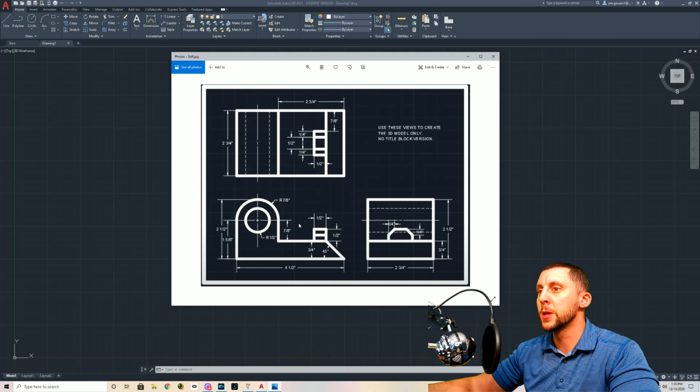Here we go, we are drawing my 3D forward drawing. As I'm looking at this, I'm always wondering what is the width, what is the height of each view. We've got 2.5 here for the height of the front view, 4.5 is the width.

That means those two numbers are going to be the same in other views. So if the width of this one is 4.5, the width of the top is going to be 4.5. Pay no attention to the 2 3/4 right now. From one side all the way to the other should be 4.5. The height, 2.5 and 2.5.

So the height of the front is 2.5, it has to be the same in the right side. There is a drill hole here, and that drill hole goes through the entire object. You can tell because of the hidden lines and the center line. You can also see it in the right view, center line going down the middle and two hidden lines going all the way across.

In the front view here we see something that looks like two blocks that are stacked, but it's a little confusing, so you've got to look in other views to see what's really going on. Over here I can see that it goes up about 1/4 inch because the entire thing is 1/2 inch tall, and I can see that this part is 1/4, so the other part has to be 1/4 because 1/4 plus 1/4 is 1/2.

But this is going to go up about 1/4, then it's going to have a chamfer on it, and then it's going to go across by 1/2, and I know that because over here we've got a 1/2 measurement. Then it's going to chamfer down over 1/4, and then come down another 1/4. Let's see, what else is important here?

From this part to the very end of the object, 2 3/4, make sure that your views line up. My students, some of you guys are missing this. If this is the front view, the very left has to line up with the very left of the top, and the very right has to line up with the very right of the top.

And I'm going to draw, let's see, where is it? I'm going to draw this front view first. It's 4.5 by 2.5, so you can box that out at first if you'd like. So I'm going to go 4.5, 2.5. Now I don't know how far across here, so I'm just going to go like this. And I don't know how high yet because I haven't looked, so I'll go like that.

Looking back at the drawing, you can see that this shelf here to this part is going to be 3/4 inch. So instead of just drawing that randomly, it's probably smarter to just draw a 3/4 inch line.

What I really meant to do was, I don't know how far this way unless I look at here. Okay, so that's how far that's going to go before it goes up, and then the rest of that, where that meets the top line, is going to be where this part is built. Alright, so let's go 2 3/4, and then we're going to go up. That gives us a spot to trim off, and our curved end is going to be here.

Now the curved end has two circles - one is the outside curve, the other is the drill hole. We've got to find the center first. Anytime you see a plus, that means there's going to be circles drawn at that center. So we've got a radius of 1/2 for the small one, a radius of 7/8 for the big one, but it doesn't say how far down to get to that plus unless we do one of two things.

We either do 2.5 minus 1 5/8, or we could do an offset of the bottom line up 1 5/8. Or you can say, this is a radius of 7/8, which means from the center of the circle out is 7/8 inch. So from here to here, that would also be 7/8. That's the way I'm going to do it.

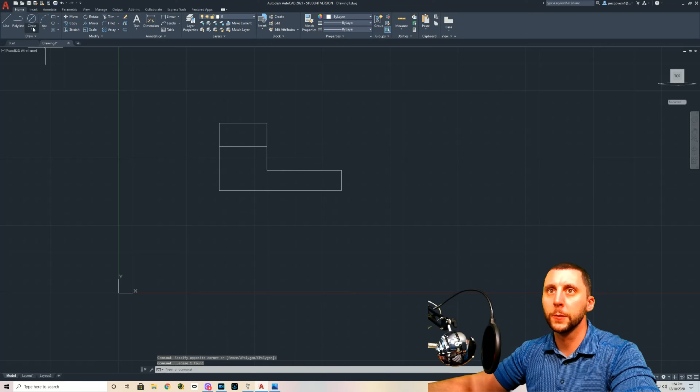Radius at the midpoint, 1/2. The other one was a radius at the same center of 7/8. Now I can just go like this and click here, or I can do 7/8, same thing.

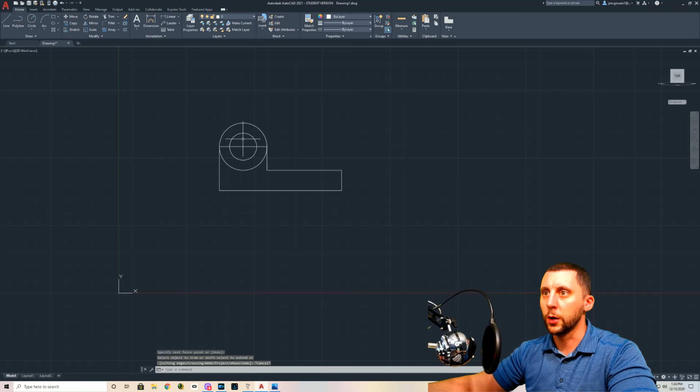The top line I don't need - there's not even any trimming on that, you just erase it. These side lines are going to get trimmed. I don't need this yet. I'm going to get rid of this and do my center lines afterwards, just so it doesn't get confusing. And I'm going to trim the bottom half of this circle.

So we're already at this point here. We need to figure out what this angle here is, and then we got to build that little block that's up here. Okay, so here we go.

That is a 45-degree angle, and we don't know the distance, but we don't need to know it. If I put a line here and go angle 45 and hit enter, it's actually going to travel this way, and you could bring it back, but we want to go the other way. A straight up line would be 90. What's 90 plus 45 would be 135. So I want to do angle 135, enter.

It's not going to give you an intersection here, so don't let it accidentally snap to this midpoint or to that end point. Just draw it a little bit too far and then trim the end off. And we can trim this and we can trim that. That also gives us our start point for the next piece, which is going to be right here.

Like I said, that piece is a 1/2 inch by a 1/2 inch, and then it's split down the middle in the front view, so we don't need to quite understand it yet. 1/2, 1/2, and 1/2 down, and then an offset of 1/4, or a midpoint to midpoint line, it doesn't matter, and you get something like this.

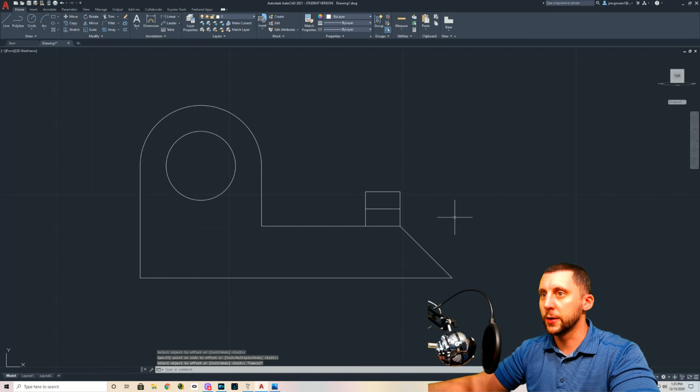The front view is now done. Now, if I do an offset here, I don't have a line up here anymore to measure my 1 inch. So if I know the height of this from the bottom left corner to the top of that 2.5, I could just do an offset off of this line of 3.5, or I could put the line back there by going 2.5 and then going 1. All right, I'm just going to do 3.5 because I think everyone would understand that. 3.5, take it from the bottom and go up.

Okay, now it's good to do that because the ends are already lined up here, so I don't have to draw anything up from there. And this end is already lined up from there, so I don't have to draw anything there either.

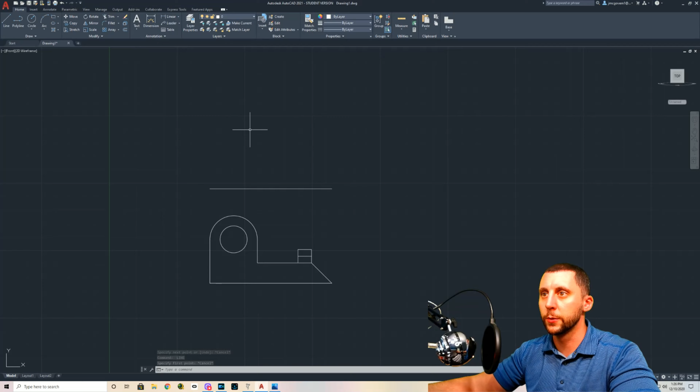So looking at the top view now, it's 2 3/4 deep. So I'll go on this spot right here. I'll go 2 3/4 or 2.75, same thing. What was this number again? 2.5, I think it was 4.5. Yep, and then back down.

Okay, so now you've got the outside box of the top view. I really like to box them all out before I do anything else. So what I'm going to do here is I'll just go like this. I could draw this 2.5, 2.5, or I could come over from the top and slide without clicking, and then click that intersection, okay? And that's going to give me the height of that right view, but I still have to do my offset of 1.

All right, something like that. So now we can get rid of this line. The depth here is the same as the depth here. Remember that if I put a line here and go 45 degrees, those lines would flip over that 45, and you can do it that way, or you can just remember the dimensions. There's only length, width, and height. So how long is it, how tall is it, how deep is it, right?

So we got - what was that? Sorry, I keep forgetting my numbers. 2 3/4. Offset 2.75.

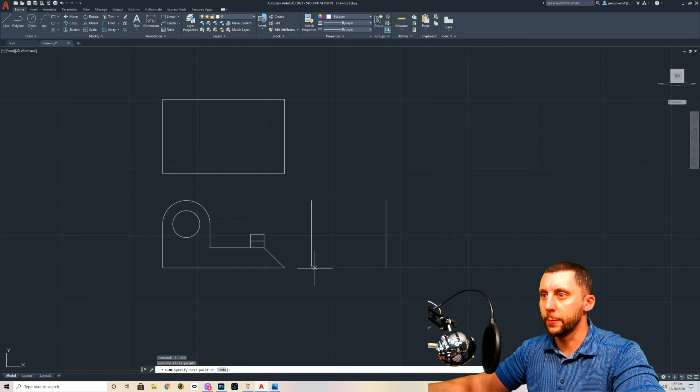All right, I'm going to connect the top and bottom, and then we're all boxed out. All right, let's go back to the top view. The top view has a line from the right side at 2 3/4. Offset 2.75, something like that. It's got the funny shape, okay, and it's got the angle.

So let's do the angle first. The angle, let's think about this. Well, we could just bring it up from the bottom, right? So if we already have this here, can't we just slide and go like this? Now that's our angle. This is a slant here, but it's drawn flat because we're doing a 2D view. So you can't tell that it's a slant, but if you go down to the front, you say, okay, that's a slant.

All right. We know that this piece here is a 1/2 inch, so we're going to go 1/2 off of this line. We know that that piece doesn't travel the whole way. It's centered in the middle, and this top part here is a 1/2, and this is a 1/4 slant and a 1/4 slant. So what I would do is draw a line down the middle. 1/2 of a 1/2 is a 1/4.

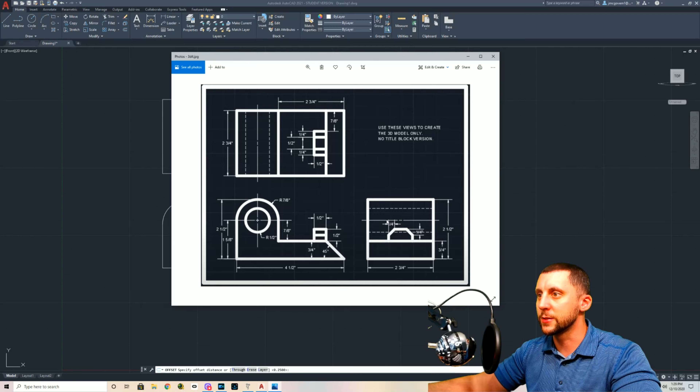So if I go 1/4 down, 1/4 up, and get rid of the middle one, that one was a dummy line. And then I have an offset of, now let's see, can we just do an offset of a 1/4 like that? Yes, we can, because the slant itself is longer than a 1/4 because it's a slant, the actual chamfer, but the distance that it travels is over a 1/4 of an inch. So offset 1/4, 1/4 from here down, 1/4 from there up, and trim and trim.

Oops, I actually did not mean to trim that other line. It should just be that and that. Alright, because we need to keep this line here for this slant, right? So the top view is done, minus the hidden lines and center lines. Going over to the right, same idea. This is a hard line here. Anytime it changes directions, that's what's going to give you a hard line.

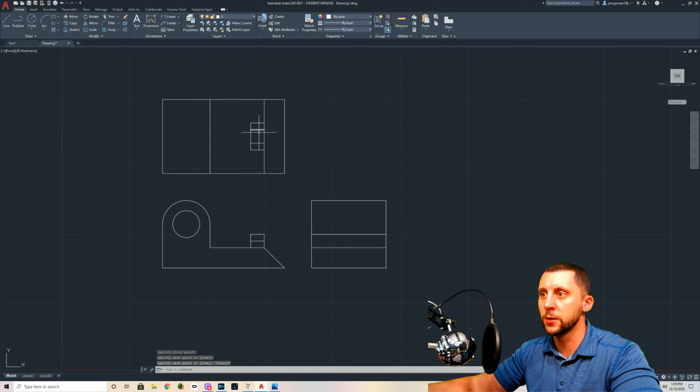So this is going slant up. So that means this point right here is going to give me a line right there. Trim. This one, same thing, is going to give me a top line. Now, it's not going to travel the whole distance. It's going to look like this. So we'll get to that in a second. The top we already have. The center is going to come across for a center line. We're going to describe this circle in a second.

The left and right will go up as hidden lines. The top and bottom will go across as hidden lines. Okay? Hidden lines show something that is happening back there that you can't quite see from that view. It's describing, hey, there's a drill hole. It goes all the way through, and by seeing the hidden lines go from front to back, you know it goes all the way through.

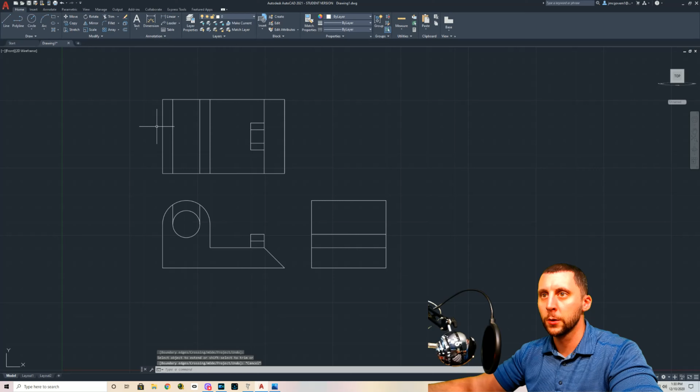If by some chance it stopped, like that, and these were hidden lines, then that would tell you that the drill hole does not go all the way through. But it does, so I'm going to extend these. And I'll also draw the middle one since we're talking about it. By the way, you guys can see those bottom lines. I got to get rid of those. Alright, so we'll change those in a second.

Going to the right now, we got to finish this part. Same thing I did in this top view. I'm going to go midpoint to midpoint. I'm going to go offset 1/2. Sorry, offset 1/4. You got to take half of the number, okay, because it's split over the middle. So 1/4, 1/4 would give you 1/2, and that's actually the top part of that, which means we can go like this. These two are dummy lines, but you're going to leave them there for a second because we need their positions, okay? If we go another 1/4, that's going to give us the bottom left position of this shape.

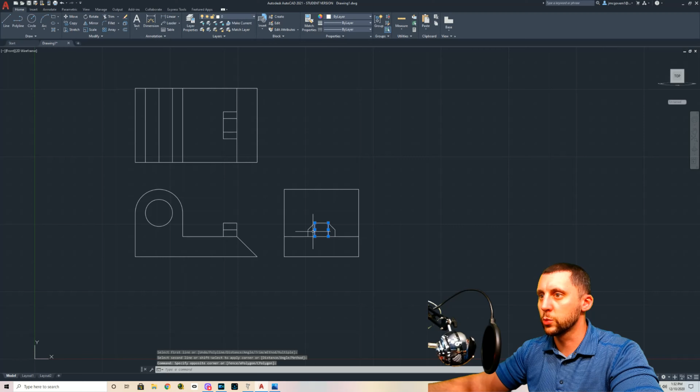And that will tell you that, let's see, let's actually just do a chamfer here. Our chamfer is going to be a 1/4 distance. So as long as I have this right in my head, chamfer distance 1/4, 1/4 for distance 1 and distance 2. Should be able to go like that. Spacebar brings me back in to that. And then these were my dummy lines. So that part's done. Next thing, the top is going to come across for a hidden line.

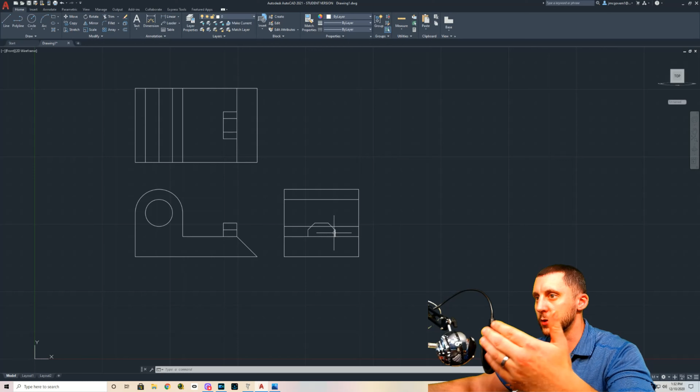The bottom of the circle is going to come across for another hidden line. Trim those. Don't let this accidentally get left there, because we don't want another line through there, and we don't want that one. Okay, now this one is going through this piece, but it's not affecting it. It's just saying that this is in front, it's closest to us, and this part is in back, and it's going to be dotted in a second when we change the lines.

From here going across, that's going to be the center line. I like to extend the center lines by 1/4 of an inch. So if I go 1/4 down, 1/4 up, 1/4 left, 1/4 right, I can extend these past the actual view. Those were dummy lines just to get that position, and you get something like that.

We also need to put center lines on the front view. So if I go from here down, I'm going to want to extend this 1/4 of an inch past this circle. So if I do an offset of 1/4, I can go off a curve like that and extend. I can also do offset 1/4 off of this circle. Just be careful, because you don't want to leave that circle there. It's a dummy circle. Get rid of that. Get rid of that. So now it's extended by 1/4 here.

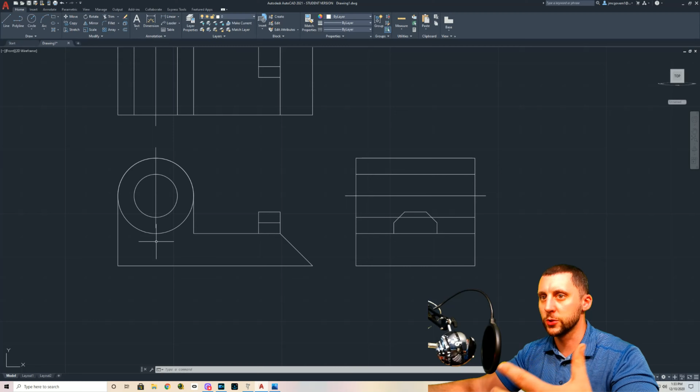And actually, technically, if this circle was full, so let me put that circle back for a second. It should actually extend 1/4 of an inch. If it's going 1/4 of an inch past this circle, it should go 1/4 of an inch past this phantom circle where you can't see it anymore. So let me change my mind on that, and we're going to go 1/4 of an inch outside of this circle again, and just extend that to there, and then get rid of this.

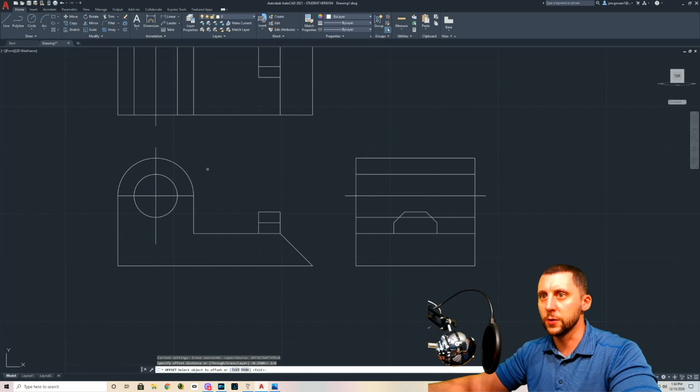I have two circles right now. I have a full circle and I have my half circle, so I'm just going to erase the full one, and you get something like that. That makes more sense. Okay, that's the way you're supposed to do it. Now this, I can go from left to right. I could have left that other circle here, but I guess I wasn't thinking at the time. 1/4, like so. And now we have our center lines done.

Okay, the last thing to do is go into your line types. If they're not loaded yet, go to other, and you're going to go to load, and you're going to find the, now we normally do the center 2, which is the 0.5x, but we're going to see what that looks like. We may need to change that or change the scale, because in the last drawing we were having a little bit of an issue seeing the center lines. Okay, so we'll load center 2, we'll load hidden 2 for now.

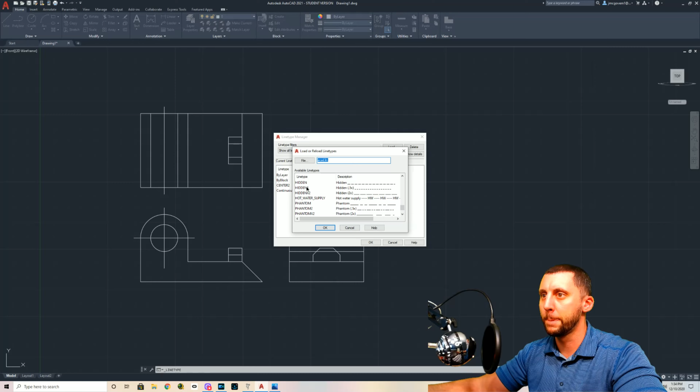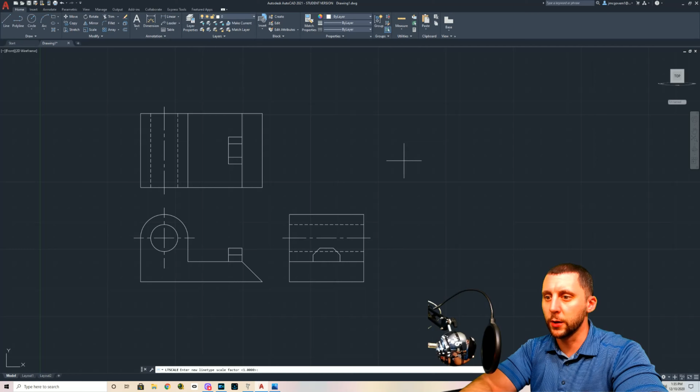Hit OK. That's a hidden, that's a hidden. Hidden, hidden. Go up here, change the line type to hidden. Those look pretty good to me. Okay. Center lines. 1, 2, 3, 4. Oops, not continuous. Center. And those look fine to me too. I wouldn't change anything. Okay. Now let me just make sure that my LT scale, yes, it's 1. Okay, so you guys are good. It's not going to look any different on your screen than it does on mine. Okay. So that's it for the views.

If you're one of my students, you're going to put dimensions on these. I want to know how wide, how tall. I want to know how big this little shelf is here. How wide, how tall, what are the size of these circles? How tall, how wide, right? And just tell me what I need to know on this drawing, just so I could recreate it if I needed to off of your plan.

Okay. You're also going to put it inside a title block. Too many people forgetting to do that. Bring your title block into this, or bring this into your title block, or open your title block, do a save as, and then draw this inside of it. That's probably the easiest way.

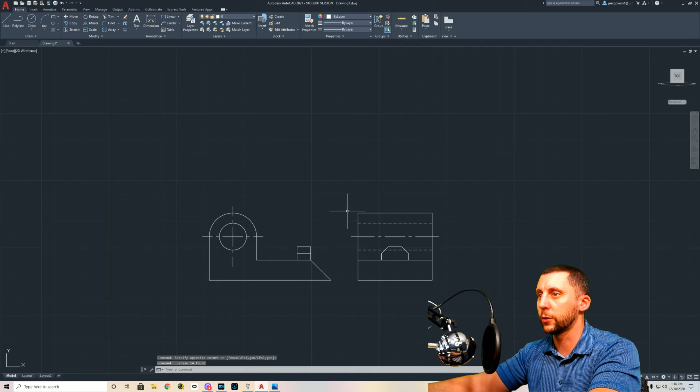Okay. So now I'm going to do the 3D model. My students, you're not doing the 3D model yet, but you're watching the 3D model part, just so that we can learn how to do it, because we're not quite ready to do 3D yet with the web app, but we'll get on the software soon.

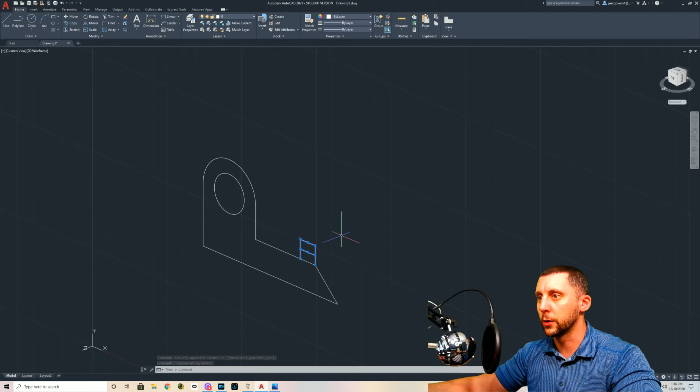Okay. So I'm actually going to delete this part, and the reason is that if I extrude this all the way back, it's going to make it seem like it goes from front to back, but it doesn't. It's actually just in the middle here, right? So I'm going to bring my view back, erase this stuff, and we'll go with this part for now. This is the main part of the model. So if I now switch back to top, I'm looking down at that shape, right?

And you're going to hit the bottom right corner. That gives you your 3D view. I need to join. When you go to join things, you do not join another shape inside. It has to just be the outside shape, or the shape of whatever the other 3D model is that you're creating. If I were to try to join this, it's going to say one object discarded, because it's not touching the other stuff. It has to be touching and in line, making a polyline.

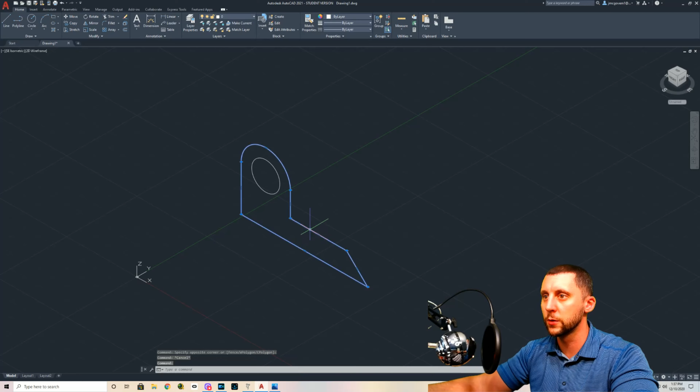Okay. Now it's okay if you select all this stuff and type join, but you will see that little error down there where it says one object discarded. Okay. It still works. I get one here, but this will stay separate no matter what you do. The depth was 2.75, so I'm actually going to change my tools first. Go down to the gear, go to 3D Basics.

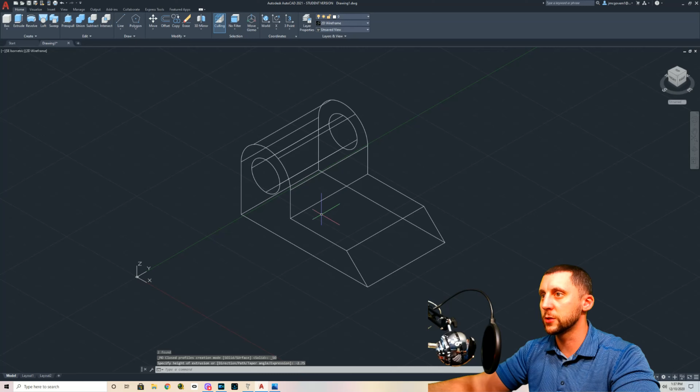We're going to take both of these and extrude them negative 2.75. Now it doesn't quite matter if you go forward or backward, because these go all the way. It would matter if this was only part of the way through the model, right? But it does go all the way through, so it doesn't matter.

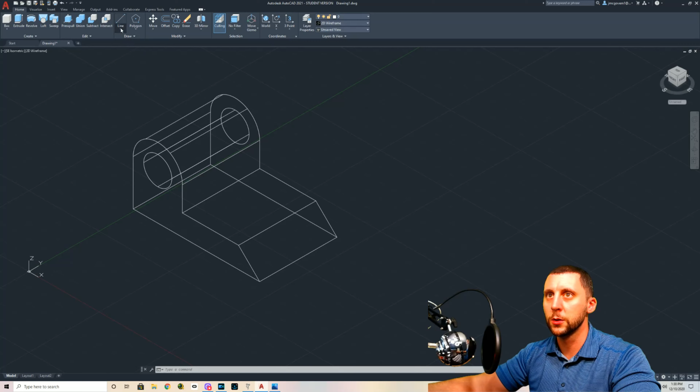All right. The next part, you could go in here and start building this next part by going half and coming back a quarter and slanting and chamfering and all that. But I think it's easier when you notice a block that's on top of another block to just make that separately. So what I'm going to do is I'm actually going to use the rectangle tool. I think that this is a good time to use this and use dimensions.

Okay, and my dimensions are going to be 1 inch by a ½ inch. I think I got that right, although I did them backwards, sorry. Let's do that again. So dimensions, it's going to be half first, then 1. Okay. Now it'll ask you which way do you want to flip it. That doesn't really matter. You can click it down anywhere.

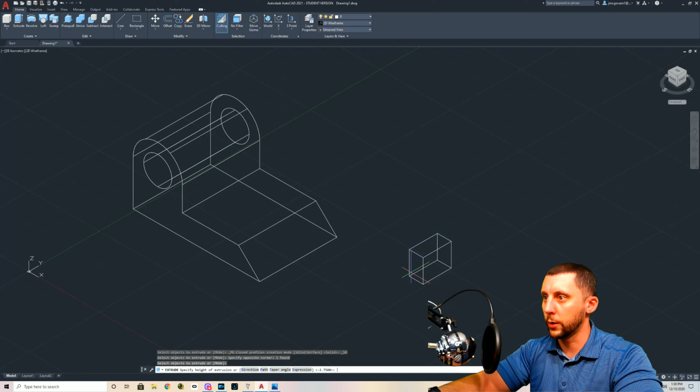I'm going to go right ahead and extrude this up by a ½ inch. Oop, I don't think it's selected yet. There we go. Enter. 1/2. And then, now don't be confused here, this is a back line, this is a line that's closer to you. So if I revolve this a little bit, or I should say orbit, revolve is actually a

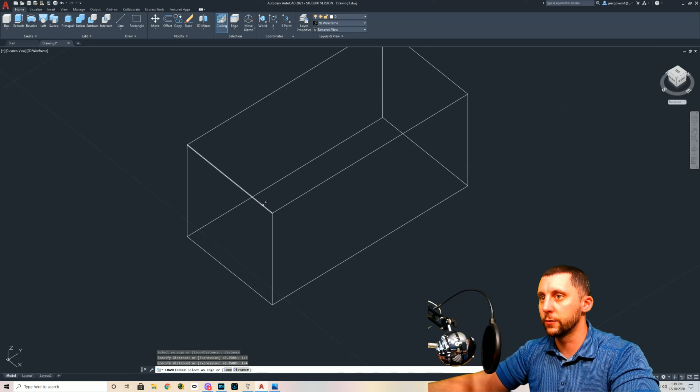3D tool, you can then do your chamfer edge, because this is a 3D model now, there are no lines here, and you're going to do distance, and you go 1/4, 1/4. Chamfer edge is the 3D version of chamfer. You get something like that, and you get something like that, and hit enter twice. That is the second model. Very easy now. Midpoint, I'm using the move tool, and I'm moving it to the midpoint.

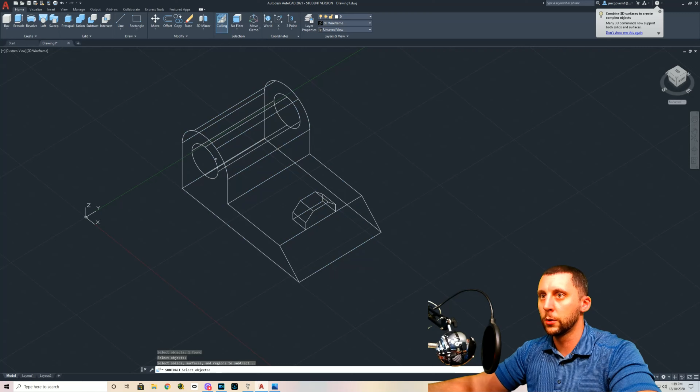All right. Last two things. You are going to union these two together. That's going to make them one 3D model. So if I were to click on this and hit delete, you'll see that that's there. The other thing is you have to do a subtract from the main model, enter, this drill hole, enter. It looks the same on 3D wireframe, but if I change this to conceptual, you'll see that now the drill hole goes all the way through.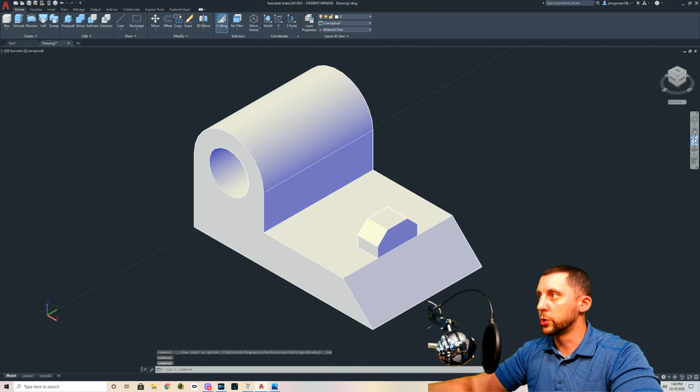I'm looking at the rest of the model. I like it. Okay, I'm orbiting, and I decide I like it. I still have to go back to the top and the bottom right corner to get that set up the way I want. If you're one of my students, again, you're not doing this 3D model just yet, but if you were, you would do a zoom extents here. You would go to conceptual, and you would actually change that to hidden, and this is the version that we would print out. Okay, we'd also put line weights on it.

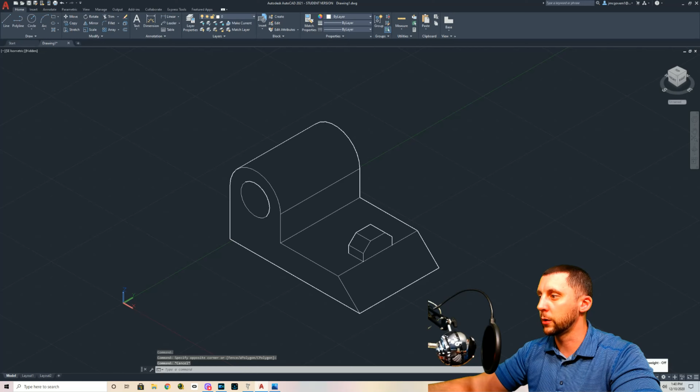So let's go back to 2D basics, or drafting and annotation. I would select this, I'd go up here, and I would do 0.7, but we're not going to see it yet because we don't have the toggle on. So we got to go back down here and click on that. That turns the toggle on. All right. So that was it. This is 3D4. We did the 2D views, orthographic views, and we did the 3D model.